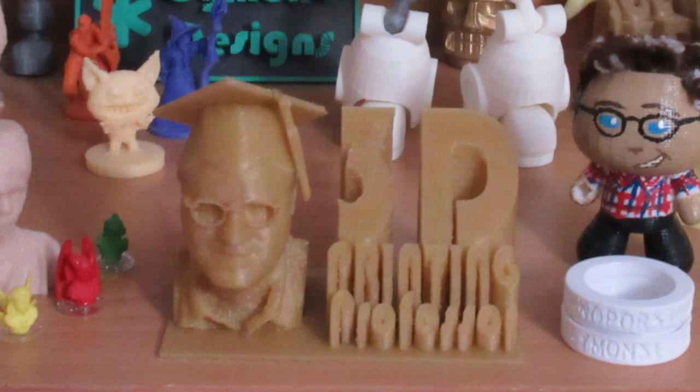This video is going to be broken up into 4 parts. Each video is going to deal with one of the top slicers that you're likely to run into and use. I recommend you use whichever slicer your 3D printer manufacturer tells you to use. If they ship their own slicer, you should use that one. But if not, you can pick, and here's a couple of the choices.

To save you from having to watch through a slicer that you're not going to use, I'm going to make one video per slicer. Let's go hit the slicers and get some hands-on experience and see if we can slice a very tricky model so that you can learn the settings that you need.

In this video, we are going to be taking a look at Cura, but not the latest version. This version, 15.04.6, is the last version of Cura to come out before Cura2 came out, which was motivated by the Ultimaker 3. Cura is created by the Ultimaker Corporation, but they've done a great job of keeping it as an open slicer that anybody can use, and consequently, this slicer got shipped with a lot of 3D printers.

I've got Cura set up right now to work with my Monoprice Select Mini, but the first thing you're going to have to do when you load up Cura is set it up for your printer. So let's first talk about how we run Cura.

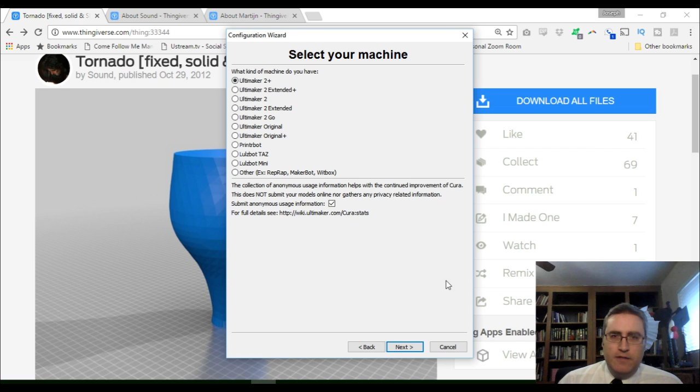The main things that you need to set up are the size of your build area, how many extruders you have, whether you have a heated bed, and your G-code flavor, and whether your Z height drops down or gets lifted up. That depends on what type of printer that you have.

Mostly your printer manufacturer will tell you how to set up the slicer, so just follow the instructions that they give you. I've got this all ready to go, and you can set it up for multiple printers, which is super cool.

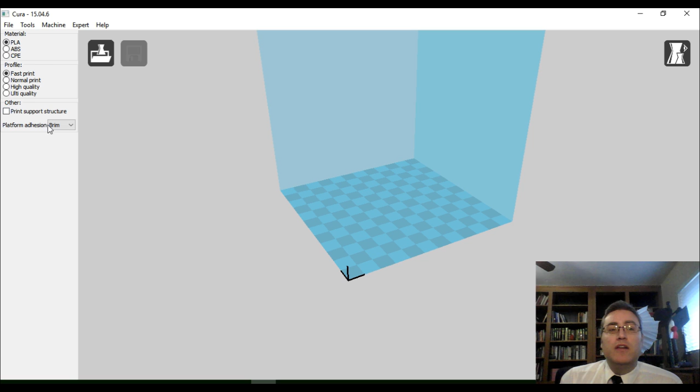Now, as it's set up right now, Cura is set up in a very simple print mode, and this is okay a lot of the time, most of the time, but I'm going to do a print today specifically that won't work with these settings.

The print that I'm going to be doing is a tornado model originally created by Martijn Elserman, modified by Alessandro Ranicciulli. I think that's how it's pronounced, and I apologize if I butchered your names, but I gave it a shot. This tornado model - well, I'm doing a tornado model because I live in Hurricane now, and hurricanes are hurricanes and tornadoes.

You know, it makes sense in my head. But this is also a really cool model in that it doesn't really need supports.

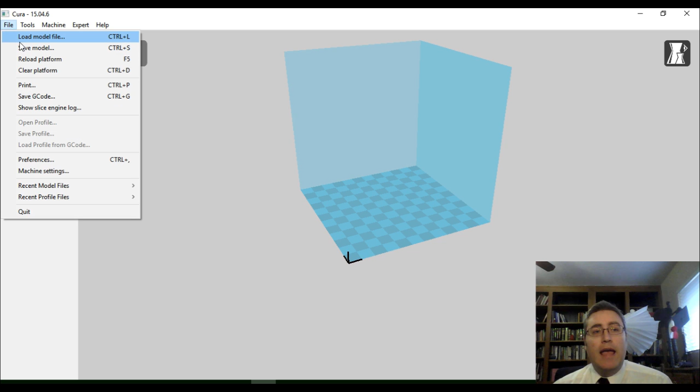Despite the fact that it's smaller at the bottom and bigger at the top, it takes advantage of those slight overhangs. So, to load the model into Cura, you either need to go to File, Load Model File, and go to where the model file is, which it should be right here, Print Projects, there it is.

Or, one way that I like to do it is I just go to the directory where I've got the file, and then click and drag the STL file onto Cura. And there it is, the model's loaded in.

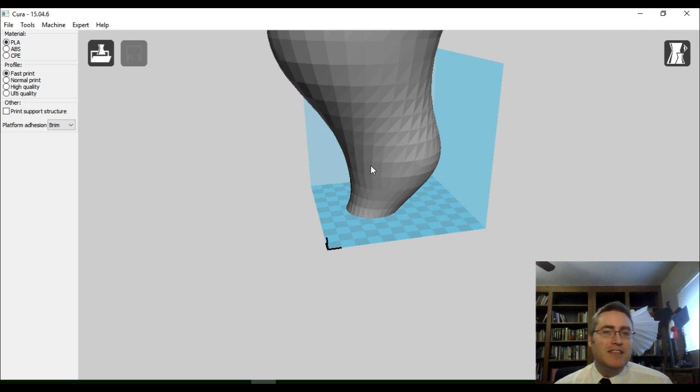Now you might notice something already, that it's a little bit big for my build space. So, fortunately, Cura gives us the ability to manipulate files a little bit.

So I'm going to just click on the file. I'm going to click these. Down here we can rotate, scale, or mirror. And also if you click and drag on it, you can move it around in the build area. I'm going to click scale.

Now, scale in Cura goes from 0 to 1. 0 being no scale, 1 being full size, and any decimal number in between describing the size of it. So if you want it to be about half size, you'd put in 0.5.

Okay, now Cura's got a cute little button right here that says to max, and if you click it, it will automatically size the print to fit in your build area. Now the print fits in my build area, and you can see that it's slicing it here in the corner with this little status bar.

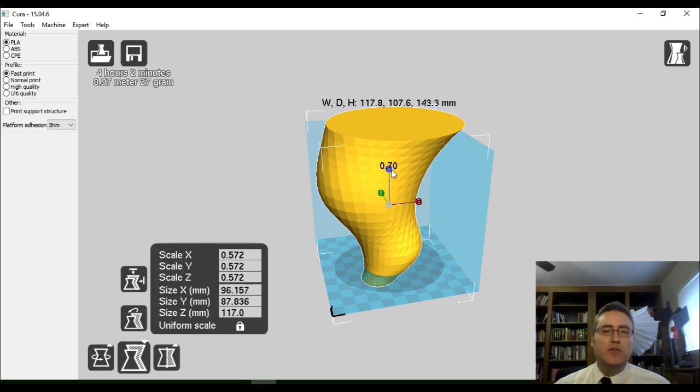But while it's slicing, I'll also mention that Cura has these little handlebars here that you can click and drag to resize it. But notice that if I click and drag any one of them, they all get resized.

I'm going to put it back to max. That's because uniform scale is locked. So I can unlock that, just click the little lock button. And now if I scale it... whoop, no, it's still doing it by all of them.

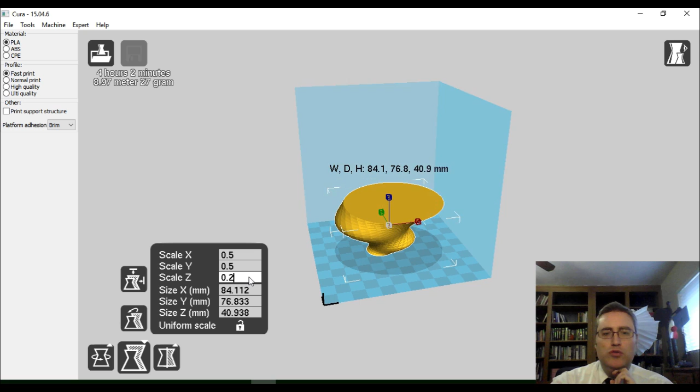Well, let me see. I can make this 0.2. And there we go. It's still just as wide, but now it's not as tall. So non-uniform scaling can come into use in certain situations.

But I'm going to go back. I'm going to turn back on uniform scaling. Set it to max. Oh, wow, I've done messed it up. I need to put this back.

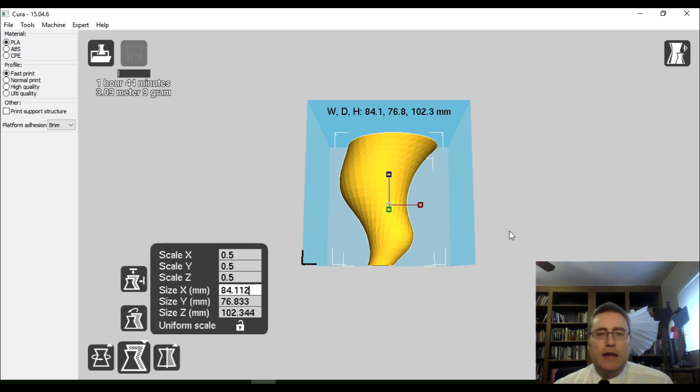Okay, unlock uniform scaling. Everybody to 0.5, because 0.5 is a nice even number. There we go, I like that. That makes me happy. Click on model, scale it. Yeah, relock the uniform scale so I don't have to deal with that. Now it's slicing the model.

And over here on the right, we have the view mode. Now the view mode allows us to take a look at our model in a couple of different ways. Mostly you're going to be using normal, but you can also look at it in overhang mode.

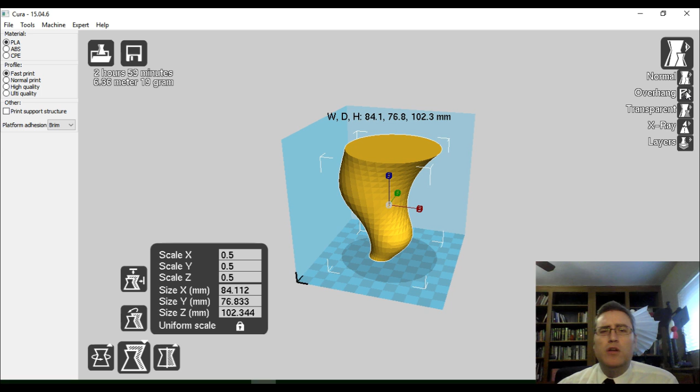Now overhang mode colors the parts of the print that have to deal with overhang that might fail. And in this case, the only place is at the very bottom of the print, which is on the print bed, which is where you want all of your overhang problems to be, because that means it has something to print on. In this case, this model is great, but if there were other places I were worried about, I might need to turn on print support structure. In this case, I don't need to worry about that.

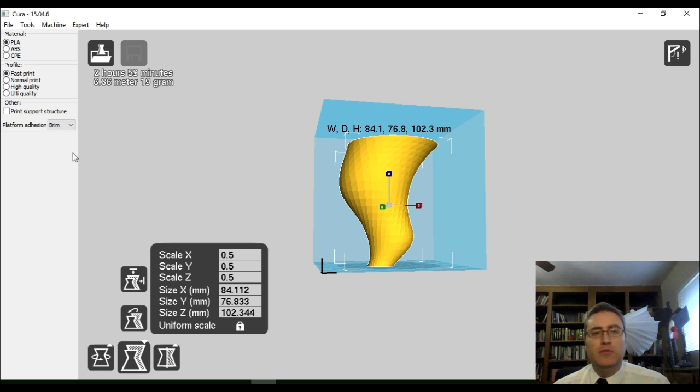There's also a transparent mode, which allows you to see the front and the back of the model at the same time. This mode just hurts my head. There's an X-ray mode, which is similar. What it does is it colors the places where you have 2 or 3 layers of things that you're looking at. This way you can see objects that are behind other objects. If your build plate is getting messy and you're trying to line things up, this mode might help. Quite frankly, I think it's just in there for fun.

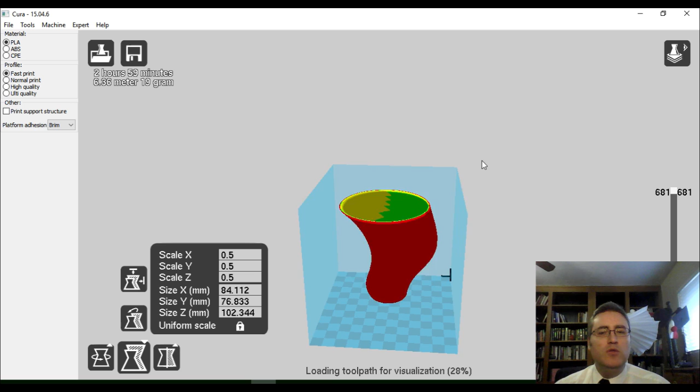And then there's the layer view. Now this view is very important, and I recommend every print you do, you look at in layer mode before you print it, because this gives you more or less the view of what your print is going to look like. It's still loading that toolpath. There we go. Now we can see it's got the top layer on there, it's got a bottom layer, and if I scroll on down here, we can see the infill pattern.

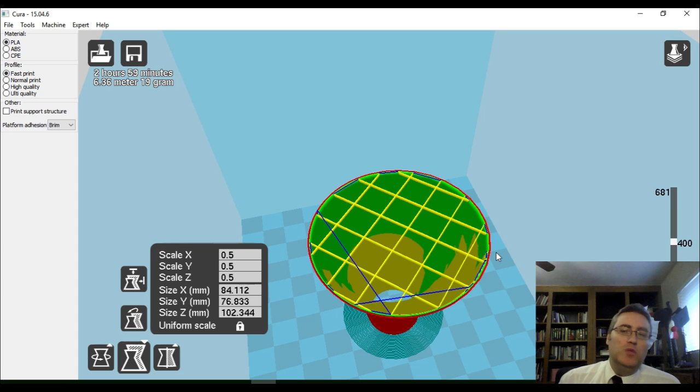However, this isn't what I want. I want this to print in vase mode, which is to say I want it to be open at the top and have a hollow interior. Now, the other thing is, notice way down here on this first layer, how it's got these circles around the outside. That's because I've got brim on.

Now, I talked a little bit about the brim and the outline and things like that, and I've got my brim settings way messed up. I've got a lot of brims on here. This particular setup is really good if you're getting curling problems, because it creates a nice stable base for your print and it will come up. But by default, it's usually just got one circle that it's going around.

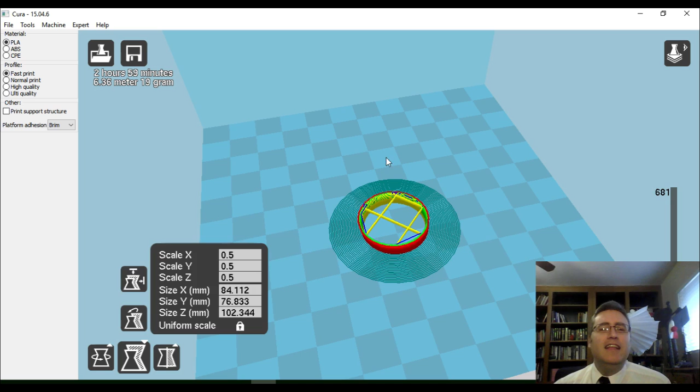However, I don't even do that. I change my start G code so that it just draws a line and primes the nozzle all by itself. But nevertheless, what I'm saying is we've got some settings that we need to address and look at. So we can't do it in this current view. There's not enough settings, we need more settings. So I'm going to go to... now again, this mode will probably work for most things, but not for this case.

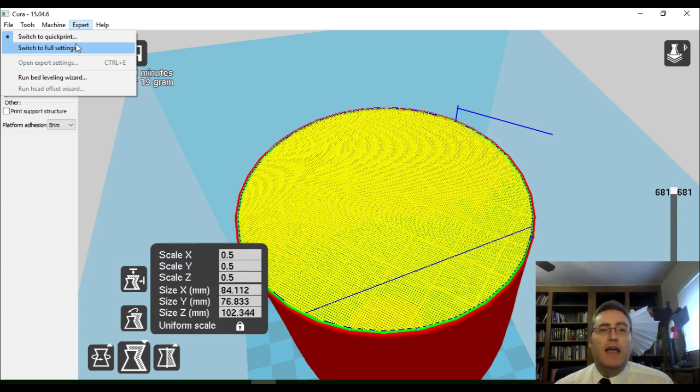So I got to change it. So we're going to go to Expert and switch to full settings. And do I want to copy the setting from my quick print? Sure. And here is the full settings. Now notice this sidebar is no longer big enough. We need it to be bigger. And meanwhile, it's working on the print piece by piece.

So let's take a look at what we got going on here. 1 shell thickness, 0.15 layer height, 1 shell thickness, top and bottom fill, 10% fill density. Wow, that's terrible. And the brim. Notice now I've got a little button next to my brim. I can click it and I can tell it how many brims I want.

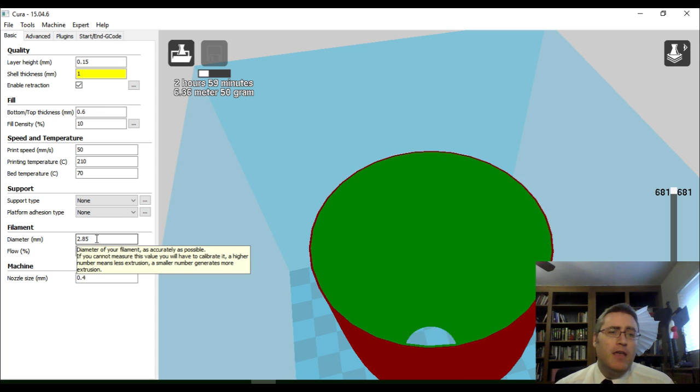I can also turn on supports here, and I can even pull up some information about the supports. How do I want it to do the supports? Really cool stuff in here. However, I don't need any of these, and in fact, I'm going to just turn off the brim in this case. I don't even need that. My filament diameter is not 2.85. Boy, I'm glad I'm here. It's 1.75. Wonder what happened to that. That's weird. My nozzle size is 0.4.

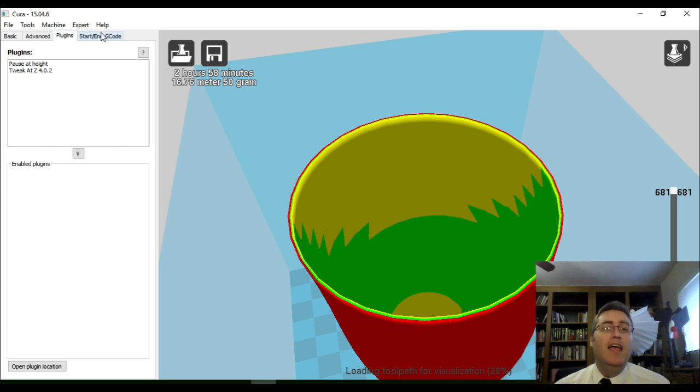Now, these advanced settings have done a good job of organizing things: the basic settings that you're going to use most often, the advanced settings that you're sometimes going to mess with, but probably not very often, plugins that you can use to do cool things like pausing at a certain height, which is super cool. And then you can actually modify your start and end G code from here, which we talked about in the slicer information. You can change the way it starts and ends a print.

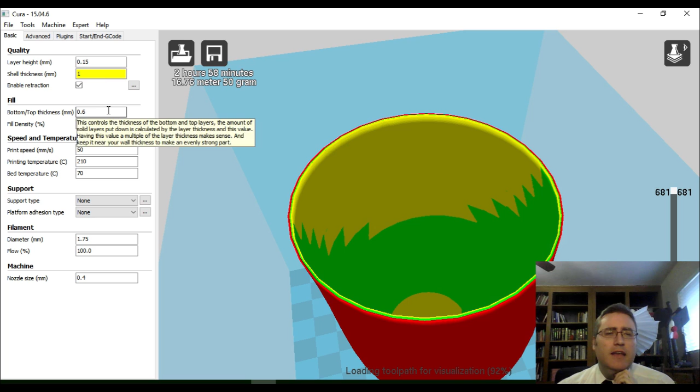Now, I recommend that if you change this, you're probably only going to change it once and you're never going to touch it again. And that's fine. That's the way it should be. But we're going to stay in the basic settings. And what I want to do is, I like the layer height, but I want more shells in here. I want the walls to be thicker. I'm going to crank that up actually to 4 shells. I want a nice thick vase. I want this thing to be solid.

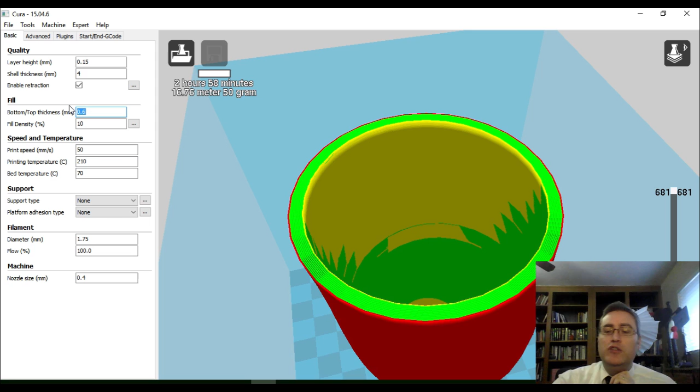The top and bottom thickness is good. Now notice that it does it in an absolute measurement. So 0.6 millimeter bottom thickness with 0.15 millimeter layer heights means that I'm going to have about 4 layers on the bottom. Notice how thick those walls are. Glorious. But I'm actually going to change this. I want a 2 millimeter bottom thickness. I want the bottom to be nice and thick, but I don't want the top. I want no top on here.

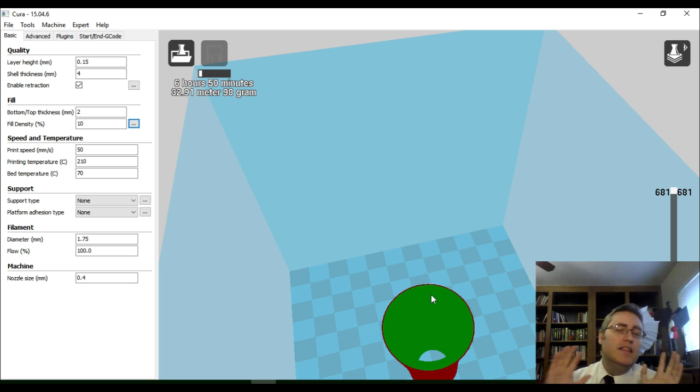So how do I fix that? Real simple. See the dot, dot, dot here under fill density? I'm going to click that, and I'm going to tell it no solid top fill. And also while I'm in here, I'm going to say no infill, 0% infill. And if I allow this to finish its processing, so we got to wait for this slider to go all the way over, then we will see something cool. So I'm just going to clip the video here, wait for it to finish loading its path, and get back to you in just a second.

No, it said 0% infill. Okay, so I just realized I made a mistake. It finished the whole process and it was still doing infill, and I realized I did this infill overlap, which is supposed to be 10. That allows the infill to kind of press against the wall a little bit. So leave that one alone and change the infill density right here to 0.

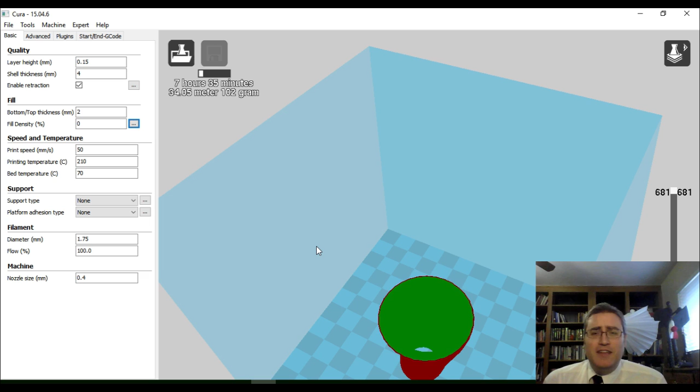I was wondering why it was taking so long. It was taking forever to process the code. I'm like, you don't have any top layers or infill. What's your problem? It had infill. So this is where you change the fill density to 0. And you want it to be a 0% fill density, 4 millimeter thick walls. And it's just going to come on up here. See how this is working. And now it's loaded. So let's just go through.

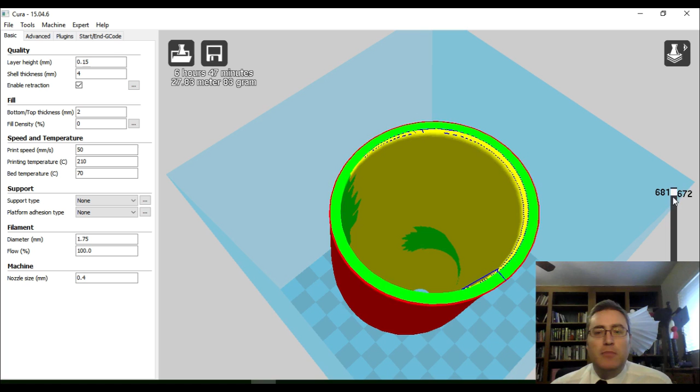And you can see now we get travel lines on the top layer. So why is it traveling so much? It shouldn't need to do that, but that's all right. And as we get to the bottom, it starts drawing. Look at that nice thick bottom there. Now, I'm still getting the skirt on here. And I'm not sure I want the skirt. Why am I getting the skirt? Well, I said no adhesion type. I click here and it's got the skirt. And so I can turn this down and I can say 0 lines on the skirt.

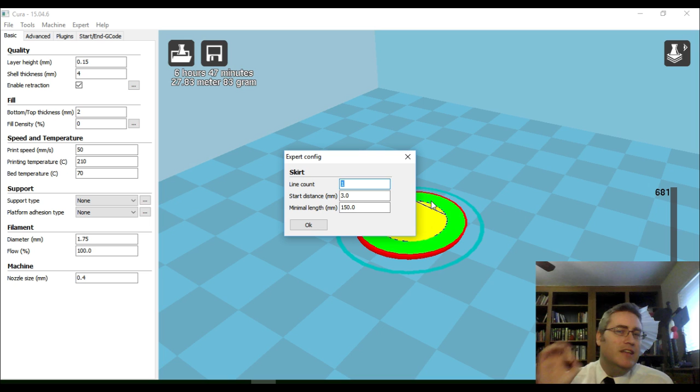I'm actually going to leave it. It doesn't offend me that much. And here we go. I might want to decrease the number of walls. I may do that for the other ones because that seems really thick. But this is going to be a nice solid vase. And it was created, again, from a model with a solid top on it.

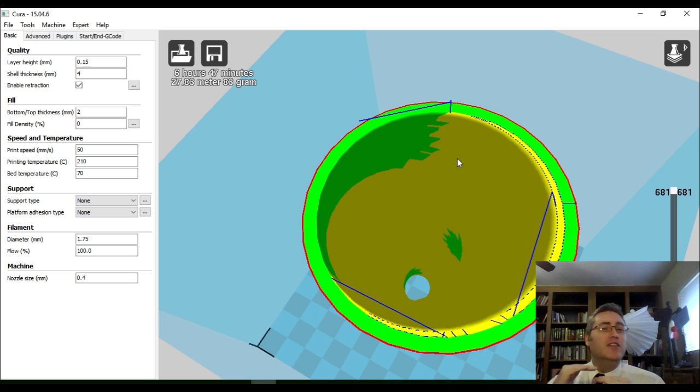Just by manipulating the settings, we took this print from having a solid top to being a hollow vase that we can use. And so there we go. There's the tornado vase, all sliced up, ready to go. Now we need to take those instructions that it came up with to draw this 3D model and save them, which you just, big save icon in the corner, easy to find.

Click that, save it. I have a place that I like to save things. It's called SD Staging. It's a directory where I can save all of my G code, and then all I have to do is take that G code and process it. Now, I normally like to name my files with a little bit of a code. This is the tornado vase because I didn't like the original name.

And then I hit dash and I say, okay, I've got this set up for PLA. So I make a little note here that it's for PLA, and I make a note that I've done it in vase mode. This is just a code for me later so that I know what settings I used to prepare this file. Then I can hit save and we're good to go. But I'm not going to save this because I'm going to have to do this again for other slicers.

But there you go. That's how you prepare a model. And all you have to do now is take that G code, send it to your 3D printer, and your 3D print is ready to go. So if you're using Cura, if you're planning on using Cura, I hope that this has helped you.

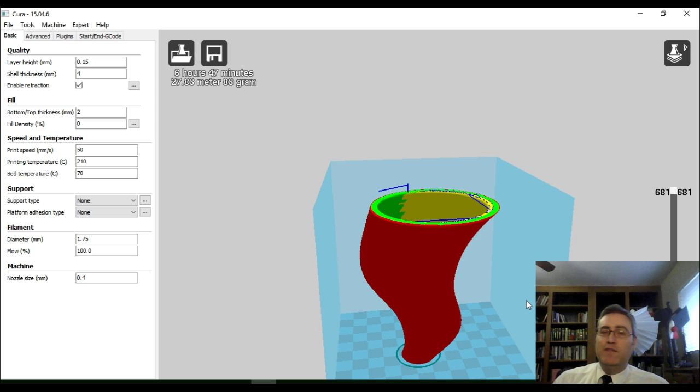So in this video, we're going to be taking a look at Cura2, which is the latest version of the Cura slicing software from the Ultimaker Corporation. It's a beautiful piece of software, and it was motivated by the Ultimaker 3 for them to make these changes. And you'll notice that a lot of things have changed from Cura1 if you knew Cura1.

For one, the user interface, all the data and information that you normally would get, which would be on this side of Cura1, is now over there. So it necessitated me moving my camera, but not a big deal. We can make do with this.

So the first thing that you need to do with any slicer is load up a model, and the model that we are going to be using again is the Tornado model here that was originally created by Margin Elzerman and has been modified by Alessandro Ranciulli, and he modified it with a top and a bottom, and so let's take a look at that model.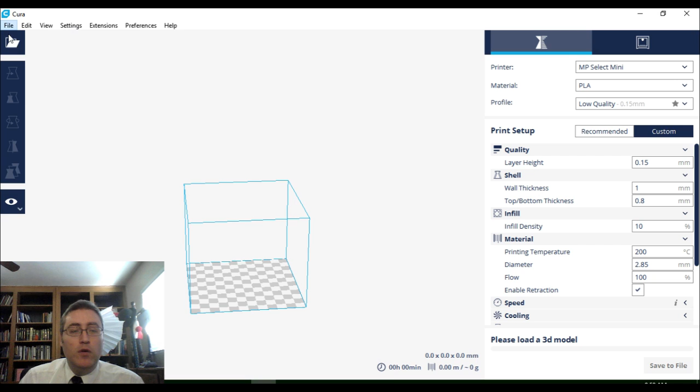So to load a model, you either click the open file here, or you click file, open file here. I've got all of my models organized in a print projects folder here, and then you just double click on the model and click open. Or my personal way of doing it is to go to where the model is located on my directory structure and just click and drag the STL I want to print in here.

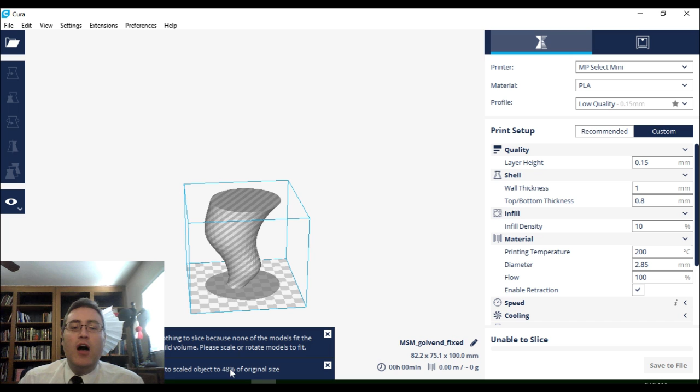Now notice that Cura immediately says, whoa, first of all, none of the models fit in the build volume. This model at 100% is too big. And so it auto-scaled the model to 48% of the original size. Now there's a little bug in the current version where even after auto-scaling it says, I still can't print it.

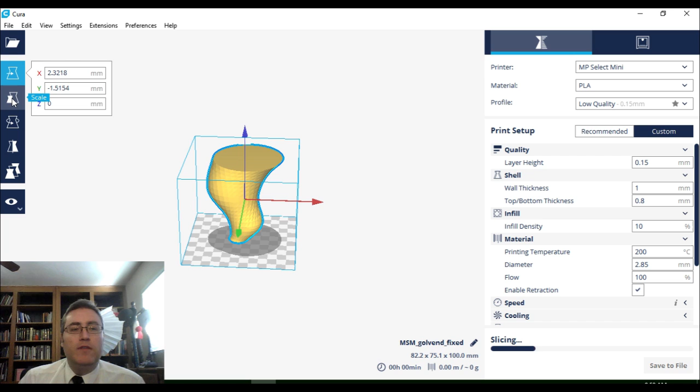But if you click on the model and just kind of wiggle it around a little bit, it'll say, oh wait, no, now it fits. And it's good. And that's one thing. You can click and drag and move the model so you don't have to print everything in the middle. Also, we have options over here to scale it. Notice it's automatically scaled it to 48%.

So in Cura2, the scale factor is from 0 to 100%. So if you want something to be half size, it would be 50%. I want this to be 45%. And there we go, because I like nice even numbers. And again, you can turn off uniform scaling.

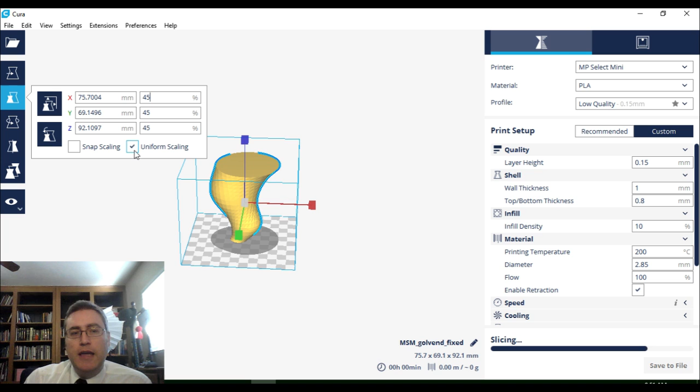And if you do that and you say, now I want it to be 20% of its height, then notice that while it's still wide, it's 20% of its height. But notice that in doing this, it created these red sections. And this is something that Cura does to warn you that these angles might be printing at too high an angle. Because I squashed it down, the angle of those facets change, and so you might want to turn on support. Now, of course, I'm not going to turn on support.

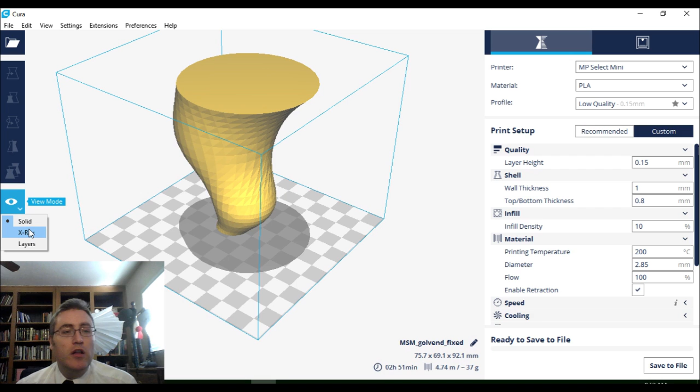I'll talk about how to do that in a minute, but I'm just going to go back to making this 45% and turn uniform scaling back on. Also down here at the bottom we have view mode, so you can view this as a solid print. X-ray mode allows you to see through the model so that you can see what's on the other side.

And then also there is layers mode, and layers mode gives you kind of a preview of what the print is going to look like when it's done. And Cura is very fast at bringing this up. So there's the top and sides. As you go on down, you can see the infill for each individual layer, and it gives you a nice shadow for the whole thing. I love Cura 2's preview.

It's absolutely beautiful. And there you can see the 10% infill, and then we can go down and we can see the flat layers on the bottom, and everything is perfect. It looks good, except that it's nothing like what I want. Because this model I actually want to print hollow with no top, so it can be like a vase. So for that, we're going to have to edit the settings. Now let's take a look at these settings.

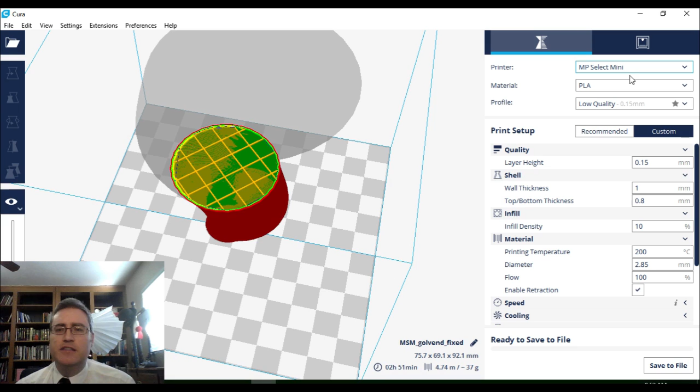Oh, I forgot to mention, the first thing you're going to have to do when you set up Cura is set it up for your printer. But if it doesn't have a printer set up, the first thing it does when it opens up is it says, hey, what printer do you want me to print on? Fortunately, my MP Select Mini was already on there, and I could tell it the size and everything. And so, yeah, that was all set up. And what material do I want to print?

Now, here's another thing about Cura 2 that I think is interesting. They've made low quality 0.15 millimeter, which for me has always been like the minimum acceptable quality. 0.2 millimeter can be done and it prints faster, but 0.15 millimeter layers are just at that crux between looking good and printing not too slowly. So it's interesting to me that that's low quality.

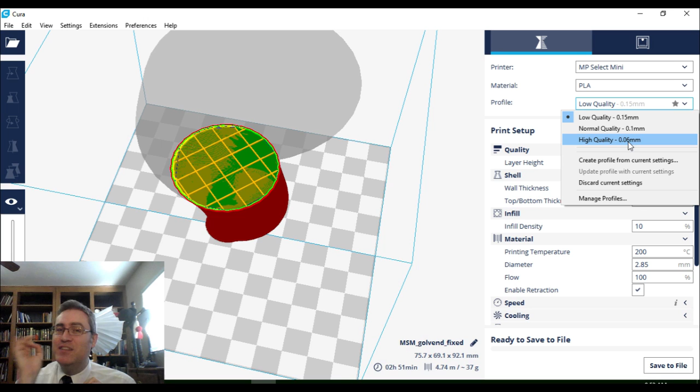Normal quality is 0.1 millimeter, and high quality pushes it less than 100 micron layer height, which is super cool. I'm going to keep it at low quality. I'm okay with that. But down below, now these are your normal settings. Down below are your advanced settings. And down here is where we can turn on our support. We can enable support right here.

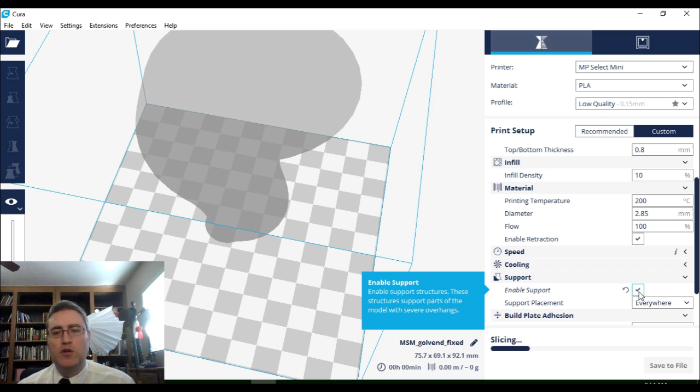Again, this model doesn't need it. So if you turn on supports, you're not going to see any difference. It's still going to reslice the model and try to see where it needs supports, but it's not going to find anywhere. Everything on this will print without supports, I think. Yes, no supports necessary for this model. So might as well turn that back off.

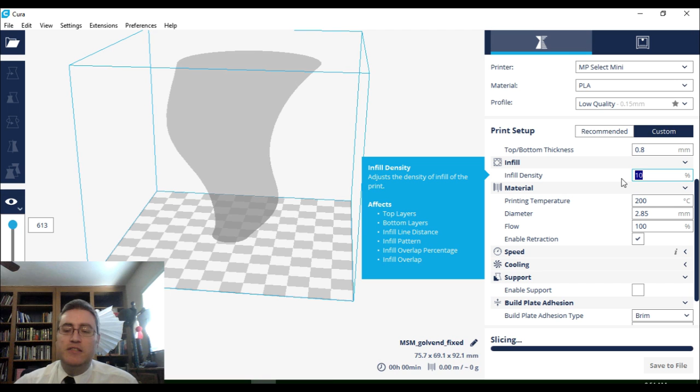So I said that I want to have a hollow top and no infill on the inside. Well, no infill on the inside is easy enough. I'll just switch that to 0%. But how do I get rid of the top thickness? Now notice again in Cura 2 everything is done in absolute dimension. So if I want 0.8 millimeter on my bottom thickness, that's going to translate to about 7 layers. But I want a nice thick bottom layer, but I want no top layer.

And in fact, I want more a 1 millimeter wall, which is interesting because I got a 0.4 millimeter nozzle. If I scroll down into here and scroll in, yeah, it looks like it's doing about 3 shells. So yeah, that's all right. I might want to thicken that up, maybe 1.5 millimeter wall heights. And I can change the bottom to be a nice 2 millimeter thick bottom or a 1.5 millimeter thick bottom. But where do I change the top layer?

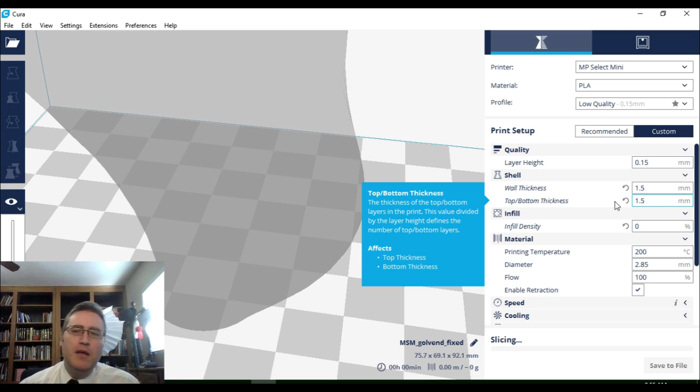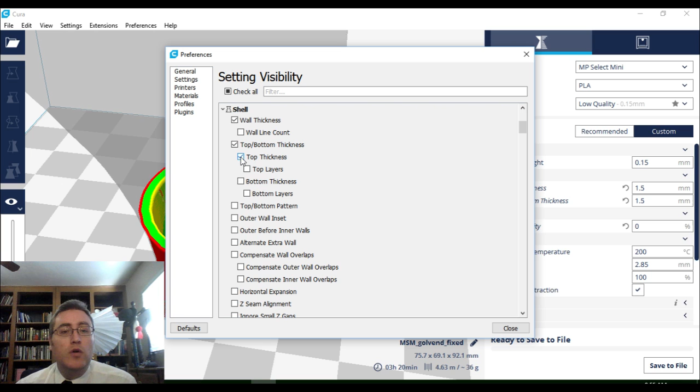Well, this is something clever in Cura 2.0. If you hover over each of these headings, you see this little gear icon, and if you click on this, a new menu comes up that allows you to turn on what settings you can see. So you can automatically just turn off everything if you don't want to see it, or turn on everything if you want absolute control. Well, I want to control the top layer, and I'll leave the bottom layer on there too. And now I can independently control these.

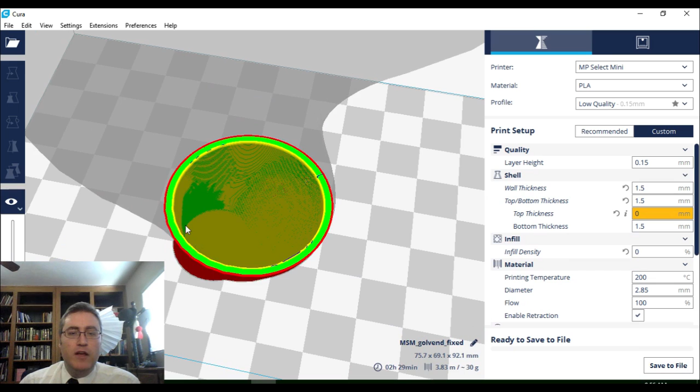So my top thickness is 0. And it's giving me a little information. It's normally calculated but has no settings, so I can restore it. And I love that you can just click the little restore button and it puts everything back. And my bottom layer is 1.5 millimeter. So as we go up and down the layers, we'll see that it prints a couple of bottom layers and then comes up to the top, and the top is hollow.

So now I've got this set up all the way that I want it to. I can turn on skirts and rafts and all those things that I want. My brim I've got set at 0. I can turn it on, but you know, all those settings you can play with. We talked about those individual settings. I've got this the way that I want, so it's now time to take this G-code file, save it, and then take that G-code file and give it to my printer.

So I can do that. It's actually down here. There's a click save to file button. Click that button right now, and then it automatically appends with a little MSM to tell me a little information about the way that it was sliced. However, I don't know what MSM means, so I'm going to delete this, not that I don't like the original file name, but it's not really descriptive, I think, of what this is. This is our tornado.

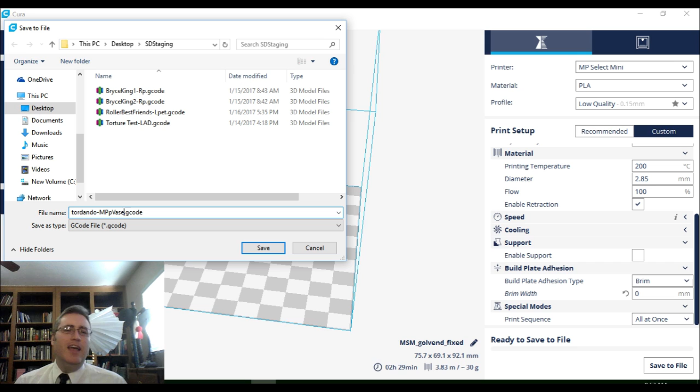I hit dash and I put in here that it's sliced for my MP Mini for PLA in vase mode. This is just a little code that I've come up with because I slice for multiple printers and multiple materials, so that I know how I sliced it. And sometimes I'll even put on here 2.5 hour, 3 hour print so that I can have an idea of how long it will take to print. I forgot to say that on my last video. That's all right. You don't have to do any of that. This is just a code that I do. I can recommend that to you if you like.

But there we go. We hit save, and then you just have to take that G-code file and get it to your printer. Now, I'm not going to save this one because I have to do this again for another slicer after this. But there you go. There's everything you need to know about how to use some advanced settings to do some cool things. And check it out. The shape of this model was not defined by its STL file. It was defined by the way that we manipulated the slicer. That's super cool.

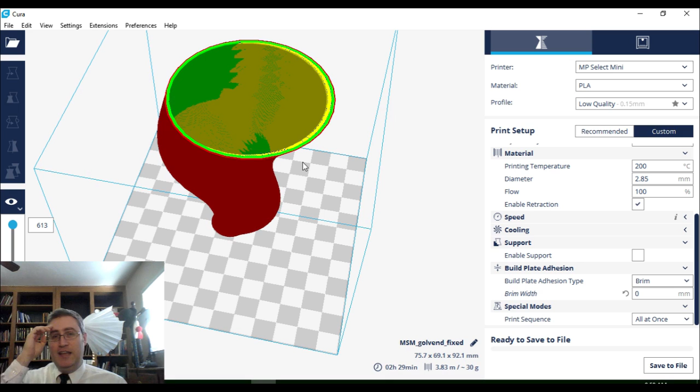So in this video, we're going to be analyzing Slic3r. Now, to open up Slic3r, it actually does not have an installer, so it does not put an icon on your desktop or in your start menu, so you have to just unzip the zip, go to wherever it is, and then run it. That's because Slic3r is usually running in the background of another app. Repetier Host is the most common place that it's used. It's a background slicer, but it can still be run on its own, so you might want to try it out, and it's simple to get running because of that.

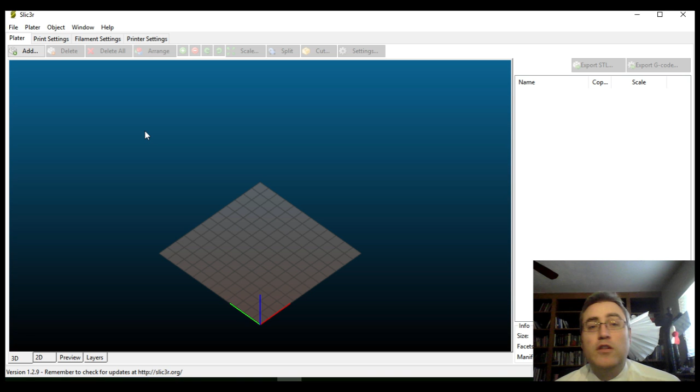So the first thing you need to do is bring in a file, and you do that by clicking the Add button under the Plater tab here. Click Add, go to where the file is, double click and hit Open, or the way that I like to do it is I go to where that file is. I've got my little print projects directory, and I click and drag the STL file into it.

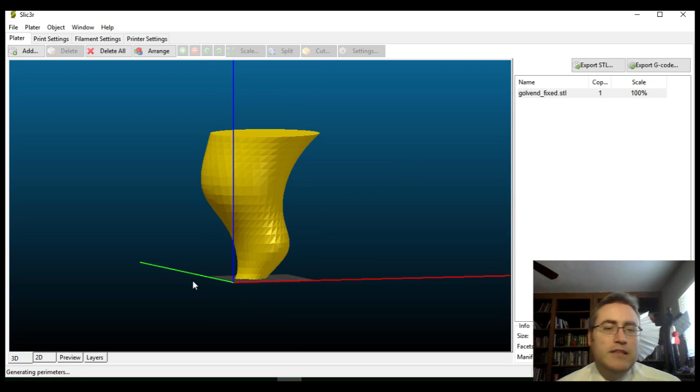Now you'll notice that this STL file is too big. So first thing we need to do is scale it down. Across the top, we've got the scale button right here. So click that scale button and enter the percentage. The percentages go from 0 to 100%. So if you want it to be about half the size of the original, you type 50%.

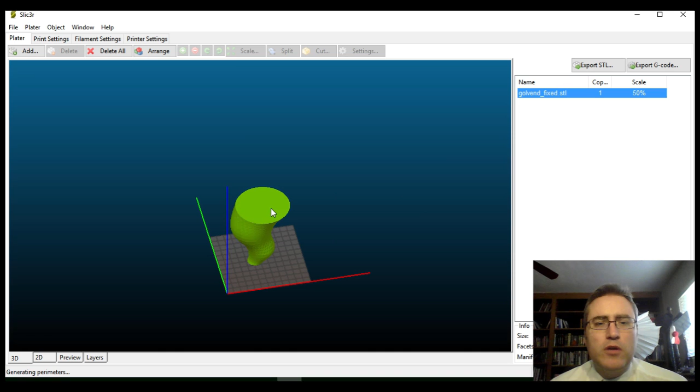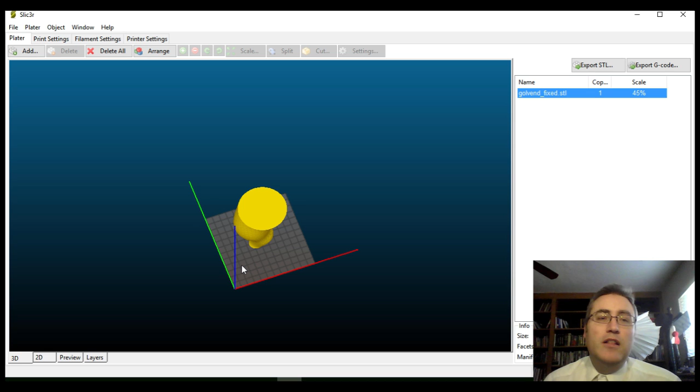You know, I'm not quite sure that's the right size, so I'm going to click it, scale it, and take it to 45. I know that will work. Now, you cannot move it on the build plate. It will always snap back to the middle. Slic3r always prints things in the exact middle of your build plate, which can be a problem if the exact middle of your build plate has been abused beyond use, but that's the way Slic3r works.

It has other options, but really scaling's the only thing that you can do. I think you might be able to rotate it. You can rotate it in 45-degree angles or rotate it freely around certain axes. Flip, scale, that's really all that you can do, and I got to that by right mouse clicking. Now, if you go to the 2D view, you can see each of the layers. How do we navigate through here? Never mind. Let's go to the preview.

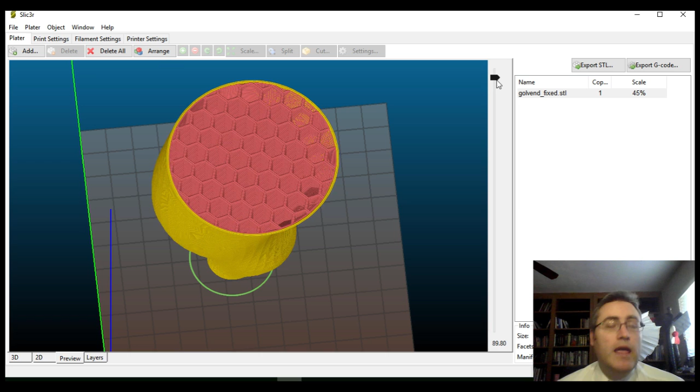You go to the preview and you can see how it's going to print, and you've got a little slider down the side here to take a look at it. And this is doing a nice little hex infill pattern, and it's going all the way down, and it's got a skirt around the outside. Lovely. Except that this is not the way that we want this to print.

And I want 0 top layers. Okay. Then I'm going to go to 0% infill here. And it's slowing my computer down a little bit because it's re-slicing it as I change these. Also, under print settings here, I can change the support material, the raft layers, the speed that it prints at, the brim, and let's scroll on down. Yep, other things, but there we go.

I'll go under filament settings here, make sure my filament's correct. Yes, nice extrusion multiplier and diameter. We're good to go. Temperature is looking about right for PLA. And printer settings, of course, I set these all up for my printer before. So let's go back to the preview, and it's already re-sliced it, and there it is in vase mode. So very easy to edit those settings and turn it to vase mode.

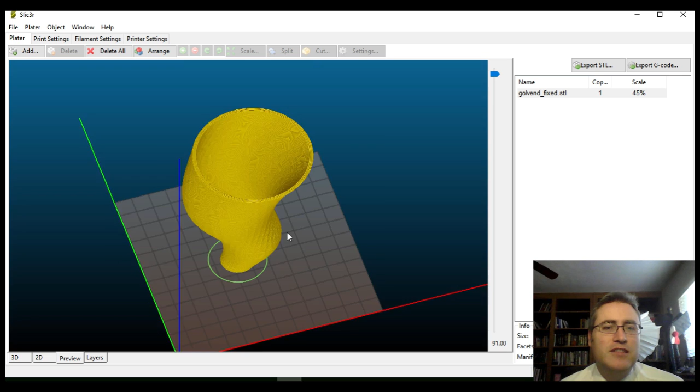Well, I guess that's done. The only thing that I need to do is export this G-code and get that G-code to my 3D printer. So I will go to Plater, Export G-code, and then I just need to put that in the SD staging directory, which is where I save things. Of course, I'm going to give this a better name. I'm going to call this Tornado.

And then I like to put a little code at the end of my G-code files to use up a couple of characters of the name to tell me how it was sliced. Of course, this was sliced for the MP Select. It was sliced in PLA, and it was sliced in vase mode. I sometimes like to say how long it's going to take to print, but in this case, it's not showing me. Slic3r doesn't give me an estimate of how long.

Those estimates are never accurate, but they do give you a ballpark idea of how long after I hit print am I going to have something to work with. In this case, I don't know it, so I'll leave it there. I hit save and we're good to go. Of course, I'm not going to save this because I still have other slicers to do this with, but you can hit save and then get that G-code file to your 3D printer and 3D print it away.

So I hope that this has helped you. If this is the slicer that you're going to be using, I hope that this will give you some ideas about it.

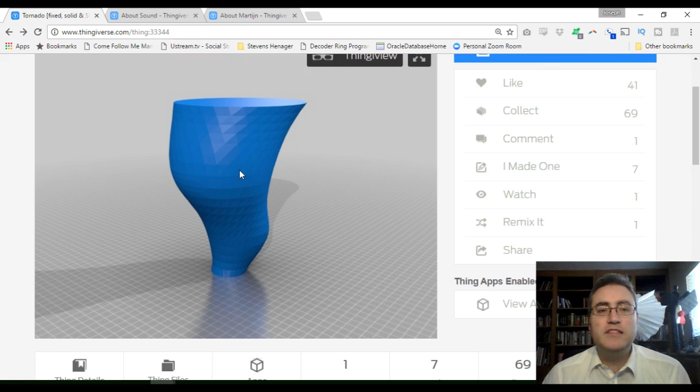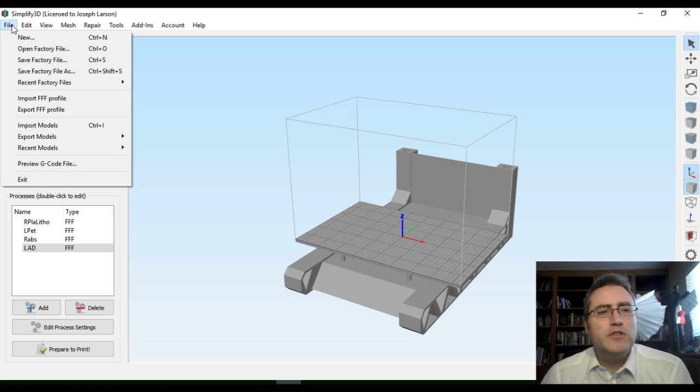First thing you need to do is click File, go down to Import Models, go to where that model is, which I have on a directory on my desktop called Print Projects. There it is, the Tornado 3D print model, or the way that I prefer to do it is just to go to where it is in my file system and drag the STL over to the build plate.

Now there are a couple things about this model that I need to talk about. First of all, it's too big for my build area. Second of all, it's not set up - my Simplify3D is actually set up for my Replicator 1, not for my Monoprice Mini. So I need to set up my Simplify3D for my Monoprice Mini and scale this model down to fit in that space. Now I'm going to talk about Simplify3D for just one second.

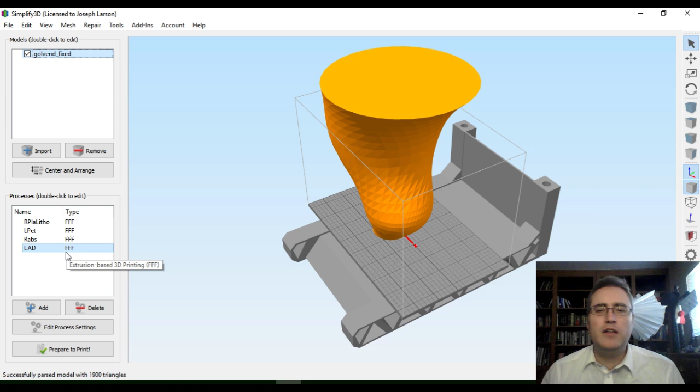On the left here it has a list of the models and a list of processes. And this is really the big strength of Simplify3D, that it breaks up things into processes and that you can use those processes to switch between them and do different models and different processes. It takes a little bit of getting used to, but it's actually not too bad.

So I'm actually going to add a process right now. I'm going to add this for my Monoprice Select Mini. Do I want to? Yeah, I don't know what changes I made, so I'm going to say no. So now I've set it for the Monoprice Select Mini. I want to set it for PLA - I love how you can configure the materials and the printer separately.

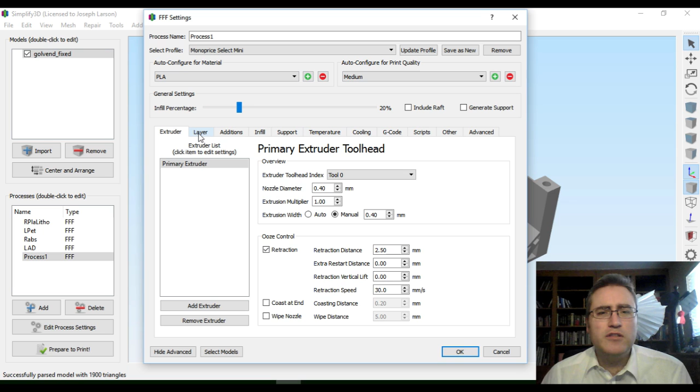Medium resolution, that's fine, 0.15 top and bottom layers. Skirt brim is off. Support is off.

Fantastic. Now I should mention, this is normally how Simplify3D will show up - it'll just be this simple interface, and I can call it MP PLA, lowercase p for PLA. That's my own little code that I've made up to keep things simple. This is how it normally looks.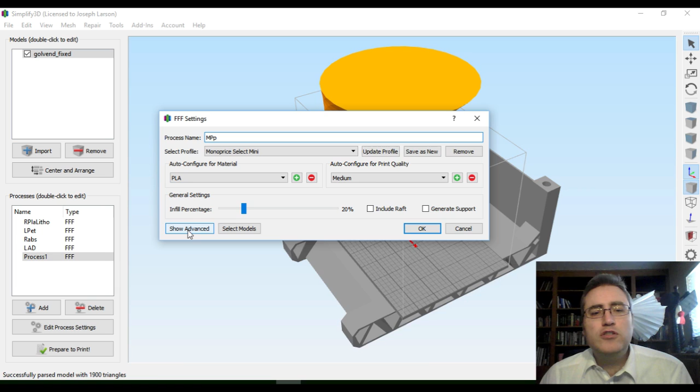You can click Show Advanced and it will show you all of these additional settings. We'll be diving into those settings in just a second, so I'm going to hide the advanced for just one second. And you can choose which models get these settings attached to them with the Select Models button, but most of the time it's one setting for all of them unless you start to get advanced. And we're not getting advanced today - well, we're getting a little bit advanced.

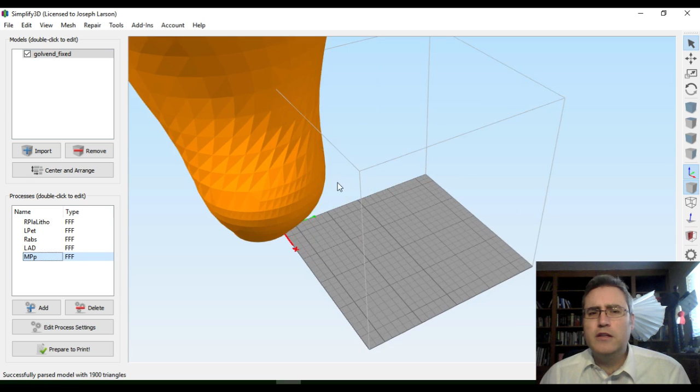There we go. Ooh, look at that tornado go. And there's lots of options here. Or you can double click the model and this really cool menu comes up. I can just zero out the rotation right here.

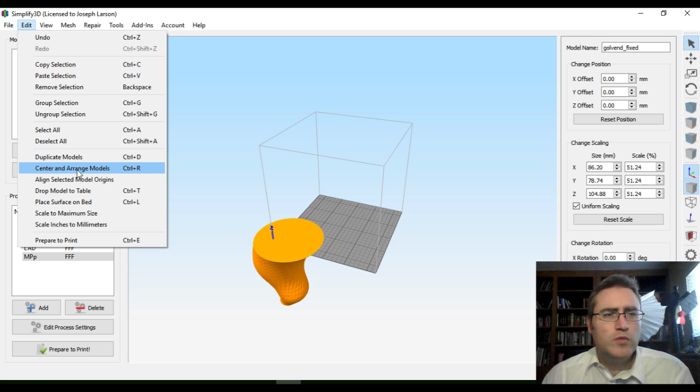So this menu right here gives us some fine-tuned numeric control for how we're going to put these things in. Reset the position. I can go over here to Edit, center and arrange models, and it will put it in place for me. That's good. My scale is set at 50. I'm going to set it to 45% just to make sure it fits in and give me a nice even number to work with. Ah, that's nice.

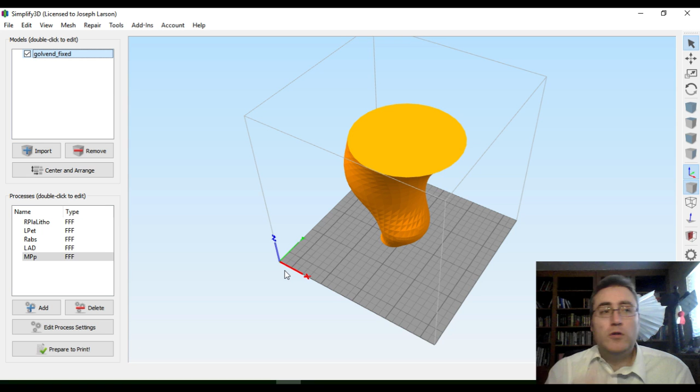I can change the model from this menu, and I really like using this double click menu to edit the model right there. And now that it's ready to go, all I have to do is click prepare to print, and I can choose multiple processes, but I'm only doing the one - I'm doing the Monoprice Select PLA print. So I click that, and really quickly...

Simplify3D slices up that model, and man, that looks good. And we can go through the layers, and it's a good looking print. Now, I will say, however, that this is not the way that I wanted this to print, because I want this to print like a vase, which is to say I want it to have no top, hollow in the middle, and have nice thick walls.

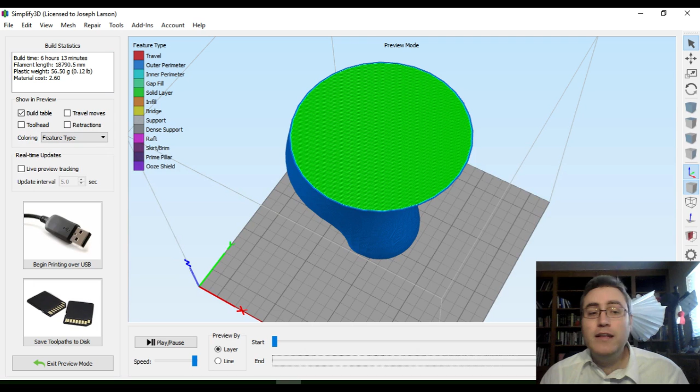And we can do that without editing the model, just by editing our settings. So let's exit out and go back into our MP Select process, and I'm going to rename this vase so I remember I edited this for the vase. 0% infill, that's the first thing we need to do.

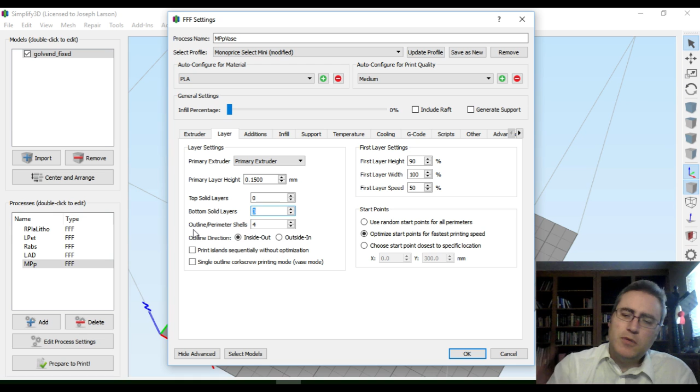And there we go, it sets it all up. Now I've got it showing me the feature types, and this green section is for the top layers. You might have seen that in other videos without explanation - those are layers put in anticipation of hitting the top, the top solid layers. I could turn those off, I don't technically need them, but they're there and not hurting anything.

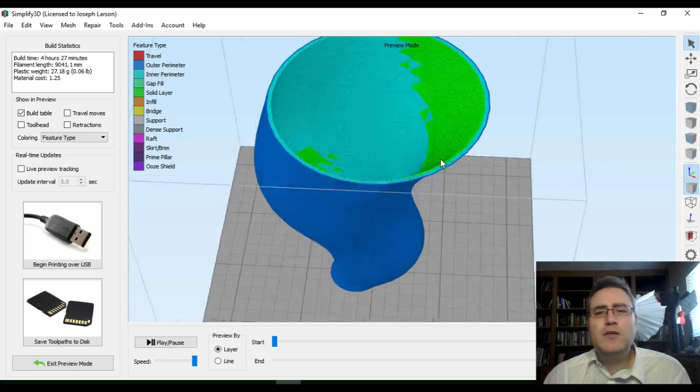If I switch this to show it by movement speed, which is another way I like doing it, like slowing down for those... how about just active tool head? I could maybe figure out how to get rid of those. I do like feature type because you have no question about what you're printing - you could just take a look here. Oh, that's not solid, that's gap fill. Huh, interesting, gap fill, okay.

Just scrolling on up and down, we can see the model. Another feature I like, which you'll see on a lot of Angus's videos, is you could hit play and have it automatically fill it up as you're going around. Makes for great videos, and I need to take advantage of that option a lot more.

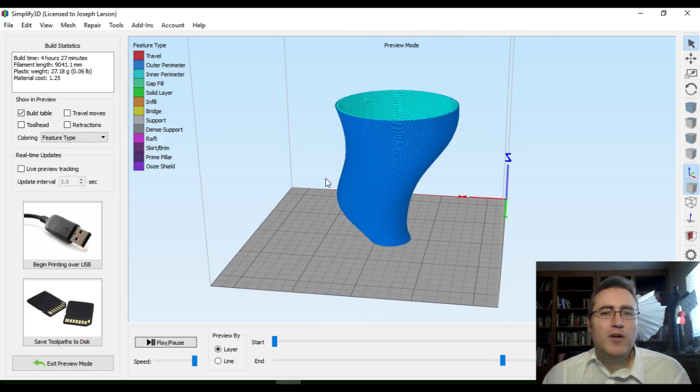So there is our vase printing. That's excellent, exactly the way I want it. I love that Simplify3D makes you go through this preview step before you do it, so you always have a second to go, wait a second, is that going to work? Is everything going to be fine? And then you just click this big honking Save Toolpaths to Disk button.

Now I've got to rename this file because it's just a terrible name. It should be called Tornado. And then I'm going to add a little code at the end of it - this is something I do, you don't have to, but I do MP Select, or since this is my MP Select, I do a small case P for PLA. I have a different code for every material I use - A for ABS, P for PLA, PET for PET. What else have I used? Just if I come up with a material, I make a small 1 to 3-letter code for it.

This is giving me an estimated build time of 4 hours and 27 minutes, so I'll just put 5 hours on there to tell myself I've got to block out 5 hours to print this model. Click save. That model is going to be saved to the disk, and then all I've got to do is get that G-code to my 3D printer, and I'm good to go.

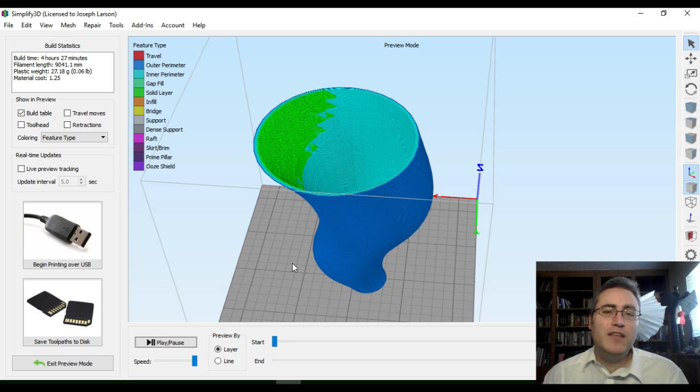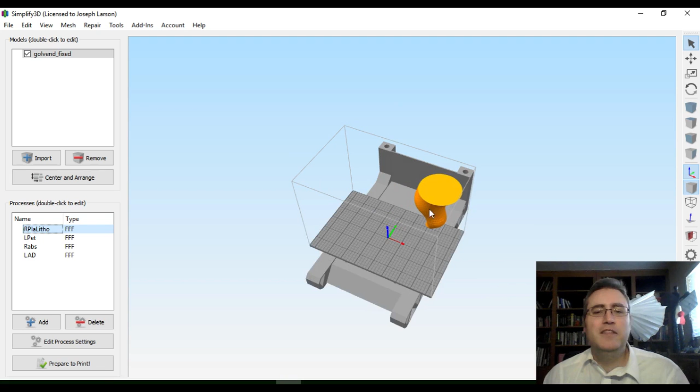And there you go, we've now used Simplify3D. The best part is it doesn't save these settings in anything more than this process. So if I decide to wipe out this process - I'll just delete it right there - then all my settings are still saved elsewhere, we'll go back to that later. Now I've got it set up on the replicator, and I love that Simplify3D makes it easy to switch between machines.

You know what, no more gushing about Simplify3D. I love it, you don't have to. It does cost $150, and that is somewhat of a deterrent for people, so that's okay.

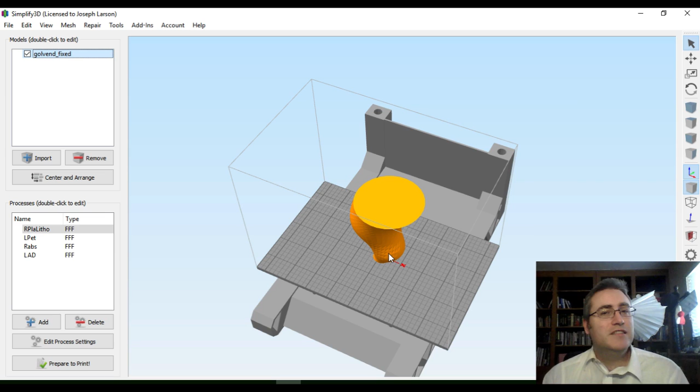No, I don't have a tie on. Blast it. That's all right. Nobody...